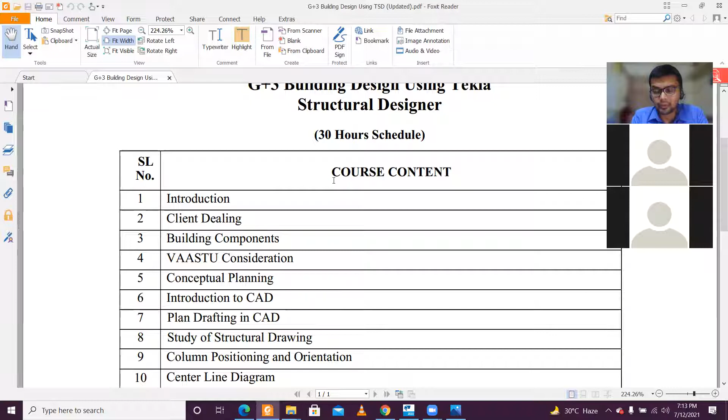Because if you want to take up your works individually - a lot of people here, after doing this course on Tekla, because we are not only teaching the software in this 30 days, 30 hours schedule, we are teaching G+3 building design using Tekla Structural Designer. This name has been chosen for a specific reason, because we are not focusing mainly on the software. Our focus is that after completing this course, you should be able to design a building completely from A to Z. So for that, we are discussing the client dealing aspects as well.

Client dealing is important because your building should be as per the requirements of your client. Those of you with experience on sites will relate to it better.

But I think one of you is a student as well. So for the students, I want to tell you, I think there are two professionals. Burhan has also joined, he is also a professional.

So there are two professionals and one student. For the students also, I'm telling, like in our course, BTech or diploma or MTech, when we design a beam, we are given the moments, the forces, and we design the beam. Same is for the footings. But here we have to design a building.

For that, the building plan should be, first of all, as per the requirements of our clients. Whatever he wants, you should do it. So for that, we are going to the client dealing part, how to take the requirements from your clients, requirements of the building for planning.

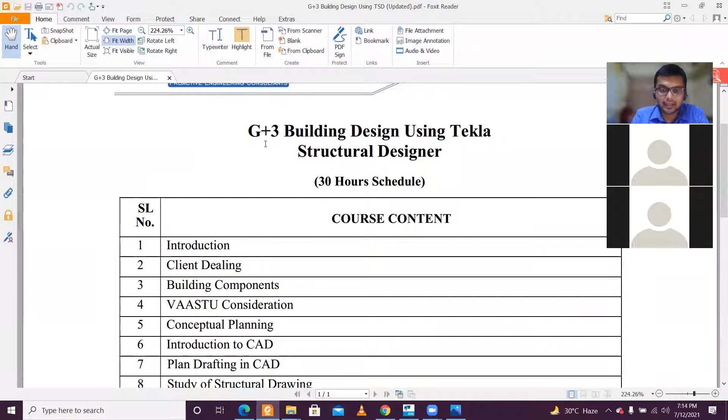So after that, we deal with the building components. What are the building components? These are the building components, not as per structural drawing, but as per the planning. The building components can be your different rooms like bedroom, kitchen, master bedroom, puja room.

So all these necessary components we just arrange, and some may be some people's necessity, some might not require it. Like for example, some people might require a balcony, some might not, some might require a separate puja room, some don't. And these are the building components. We need to know about these building components, and we need to know the basic sizes of those building components.

So why do you need to know basic sizes? Because we need to understand whether the size will suit the requirements of your client or not. We need to understand how to think about the building component. Suppose we give a standard component size of the rooms, but that won't help unless we know, okay, this is a portico or parking size of 12 feet.

Can it accommodate 2 cars? Or this is a bedroom size of 10 feet by 10 feet, can it fit a king size bed, a wardrobe, and one sofa? So can it do that? Like that, we have to think.

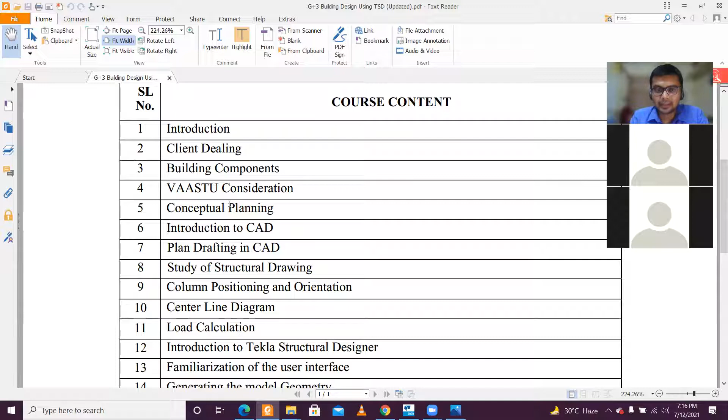So that is our consideration for the building components. Then comes our Vastu aspects. Vastu is very important, especially in India, because a lot of people have that particular belief in Vastu. It is not a science, but it is a belief. But since many people are following this, if we want to become a consultant in this industry, it is very essential to know certain aspects of Vastu which are considered for building planning.

We'll know Vastu from the building components wise, which component should be placed where. That basic part we should know. Otherwise, it will be difficult for us to communicate with the majority of clients, because almost 90% or 80% of the people want Vastu in their plan if you are dealing with an Indian client.

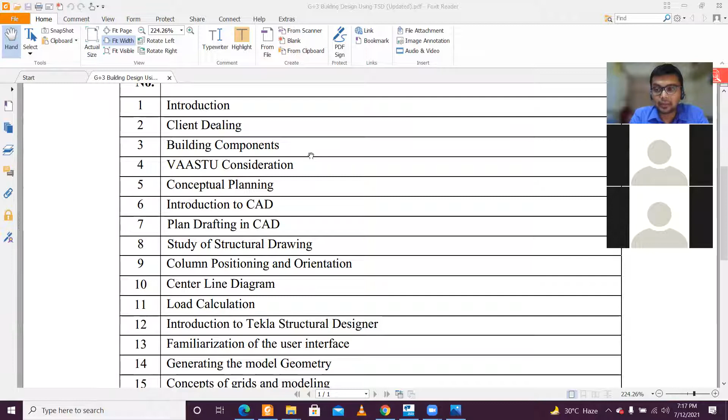So this is about the Vastu aspects, how to place which components and how to arrange your components as per the Vastu. We will know that, and after that comes the conceptual planning.

So when we talk about planning, many engineers think about AutoCAD. Planning is not AutoCAD. First of all, we have to make a structure of basics, and that contains a simple line diagram. The plan should be ready in your mind first, so we will tell you a process in which you can make the plan in your mind, how you can think about making a plan, and after that you can draw it on a piece of paper.

So we have a 3-step procedure which we are going to tell you for the planning part. Almost here 10 classes will be covered up to these first 5 topics, because these are the most important topics for the planning part.

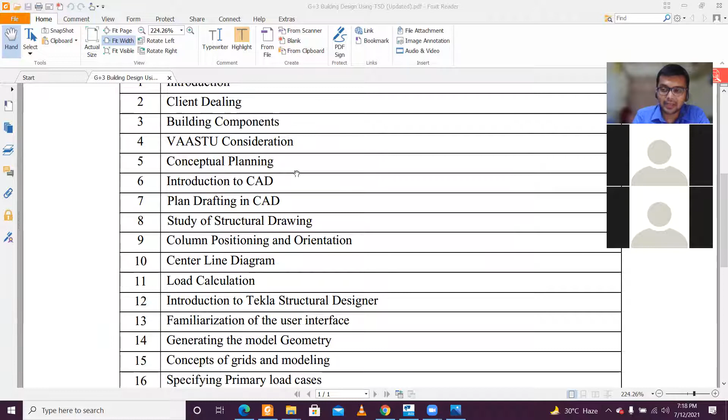And then when you have done the planning as per the Vastu, and when you have completed practicing 3 or at least 4 plans as per the Vastu, as per different sizes, and as per the architectural requirements, after that we'll move on to your drafting.

So now our drafting in AutoCAD should be defined - our text height, dimension height, and arrow size, these all should be the same. We'll maintain this and use simple commands for drafting so that we can complete our plan drafting in a very short possible time, along with the furniture layout, to complete the final architectural plan.

I'll also show you how the final architectural plan will look like in the coming video. So up to this point, when you do the plan drafting in CAD, you should be able to complete the planning part. So I'll show you the output which you will be having.

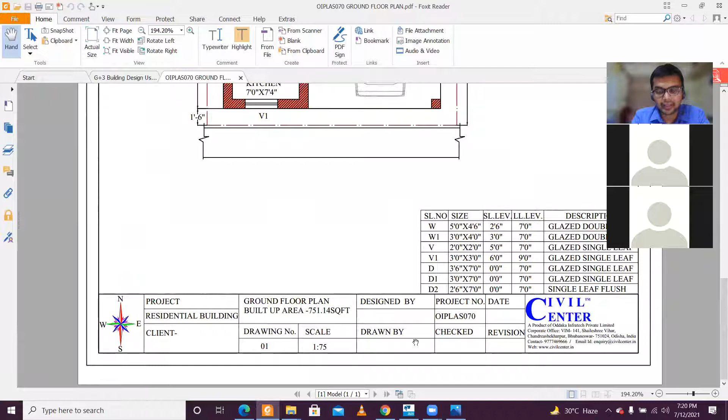And you will have the door window schedule, and you will have this particular title box in which the directions and other details are mentioned. So the first aim is to complete that, and this might look simple, but when you have to arrange components as per suitability requirements so that no space is wasted, and also take care of Vastu as well - those who have experience know better.

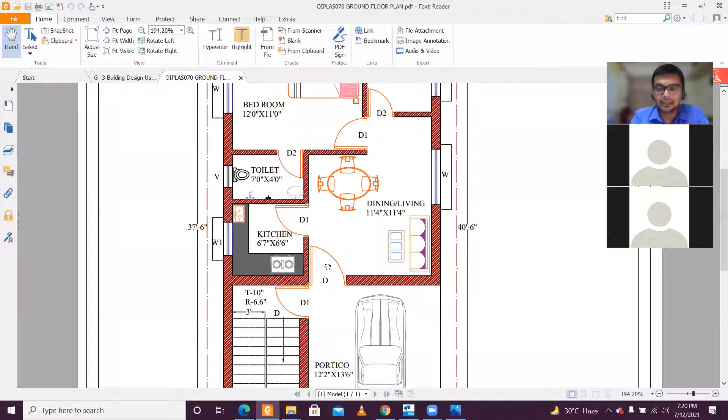It requires some practice and skills to arrange these components. We have to consider architectural aspects, engineering aspects, and Vastu as well - so all this we have to consider. So this is the first step in this process.

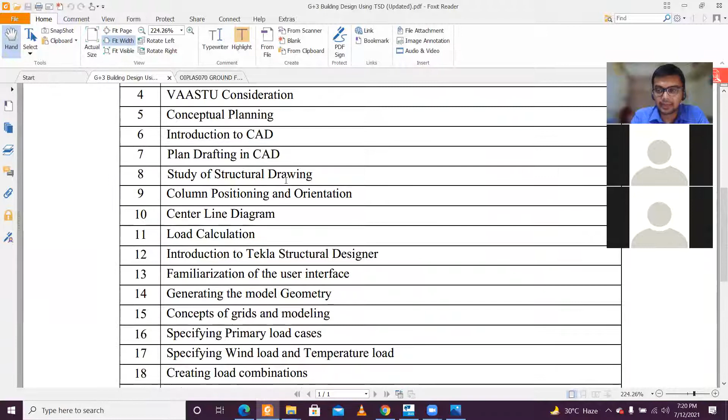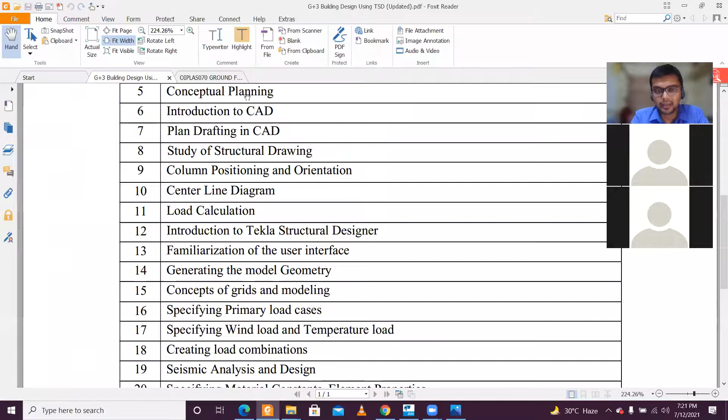And after that, once we are done with the plan, we'll go for the structural drawing. So the final structural drawing of any particular plan will contain all the components of your building. The structural components of the building are your beam, column, slab, staircase, and foundations - so it will contain all the things.

So first, when you study structural drawings, we see the notes first. In the notes, it is written that the drawing will be studied along with the architectural drawing, and the standard codes - the earthquake code, the RCC code, and the wind code - have been written here. The grade of concrete and grade of steel to be used is written here, and then the lap length and clear cover of all structural members will be written in the structural drawing.

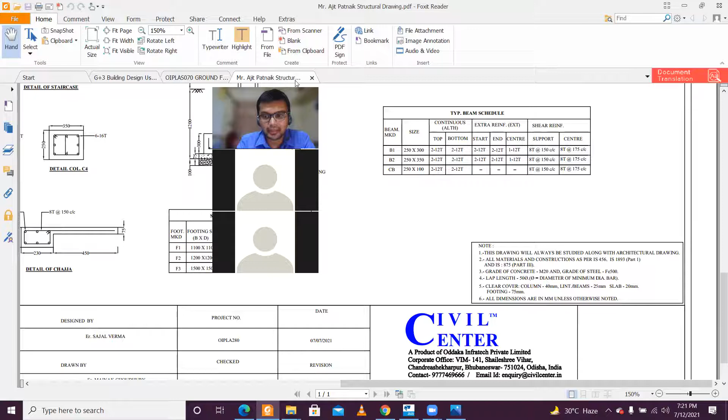So those of you who are already working, you already know about this particular thing, and some new members have also joined. If someone doesn't have any idea about this, then how can they manage? That's what we are going to show - if someone has no idea about this, they can also learn.

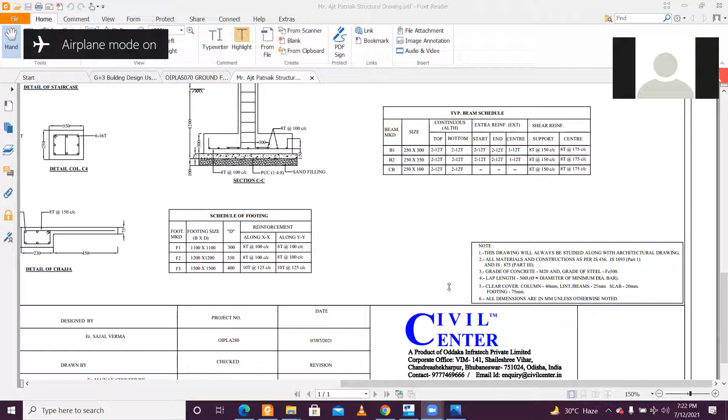Hello, am I audible? Yes sir. Okay, I think the connection got paused for a second - I accidentally pressed a button. So I think Snehash is asking, if anyone doesn't have any idea, then what should they do? I am referring to some people because they can relate to it better, but this course is done from the basic level, so everyone can do it. I'm just relating to them, but it is for everyone, and everyone can do it, so there is no issue in that.

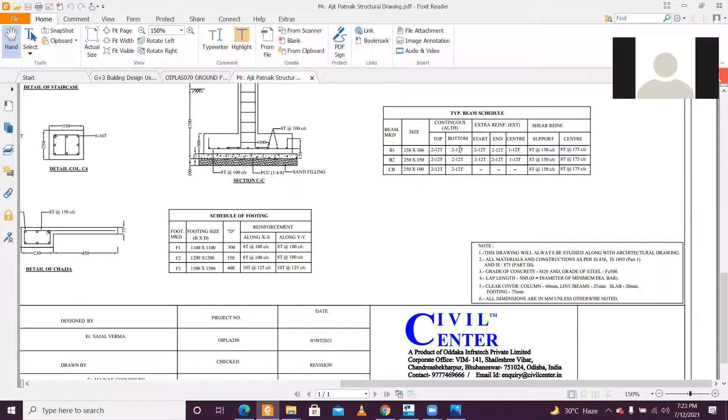So this is our particular portion of the structural drawing, and here we have this foundation layout. In this foundation layout, all the sizes of the foundation are given, or rather only the markings of the foundation are given, and the distances are given center to center.

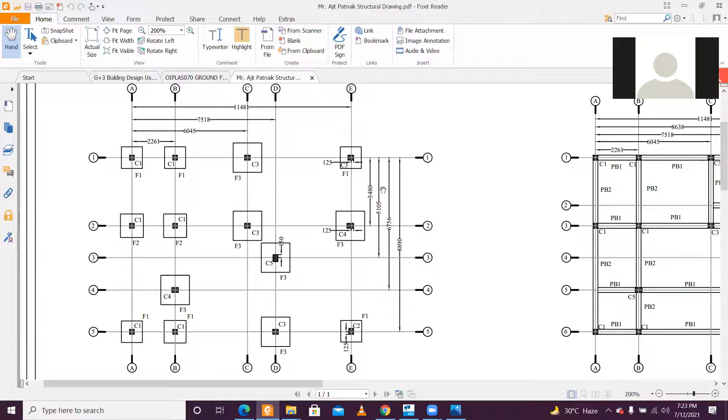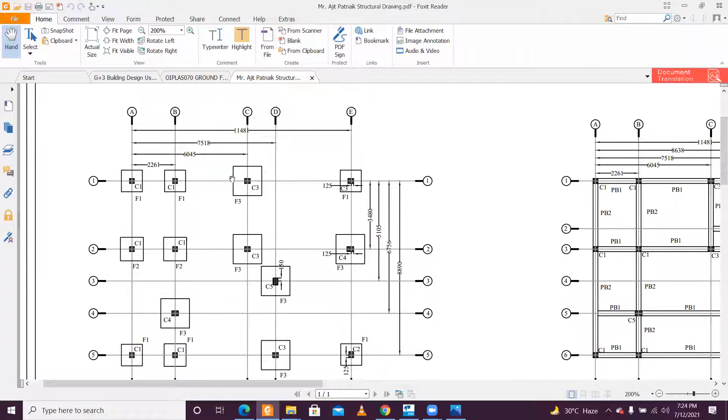So what happens - I think Snehashi had mentioned that the first thing in the construction or execution phase is the excavation. But before the excavation, there is also the marking part. In the marking part, we have to use this particular footing center lines or footing layout, and the layout can be done with the help of a total station or manually. So this is the foundation layout.

And after that, if you want to see the foundation schedule, you will see the foundation schedule from here. So this is the foundation part.

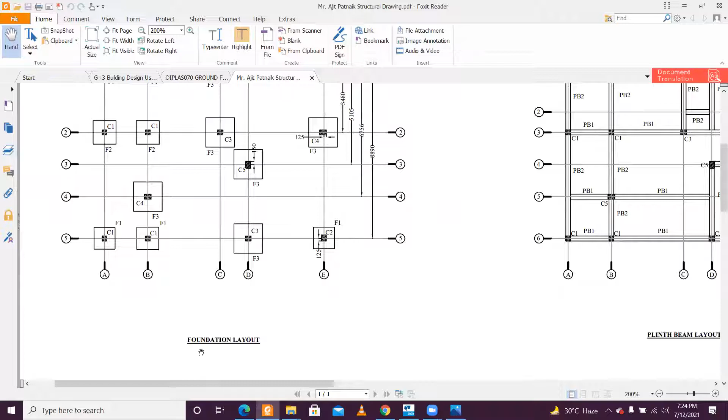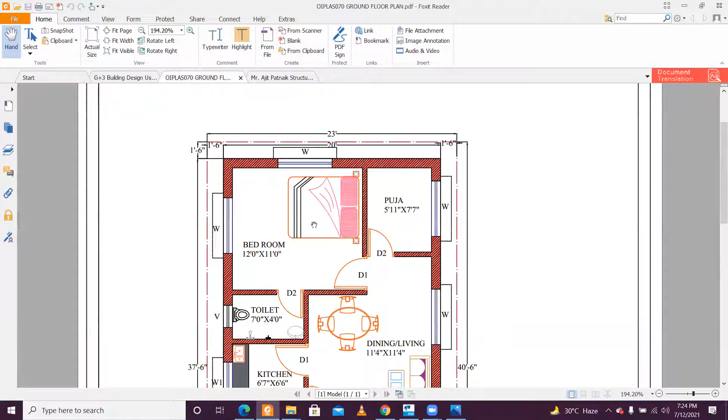After that, we'll also cover similarly the plinth beam schedule, the roof beam schedule, and also details of other structural members. Our ultimate aim is to prepare this as per the requirements given by your clients. We have to prepare the structural drawing and also the architectural plan. These two things are our final output as a civil engineer, which we need to do in planning and design.

This is what we are going to cover in this course. That's why I always say we are focusing less on the software, more on the output. We want the output because we want jobs and want to learn a skill that will be useful for us, so that if we want, we can start as a freelancer, or even start our own company. For that, we need to know the entire process, and that's what this course is.

Let me also discuss the outline now. When the plan is ready, the study of structural drawing will be done, and then column positioning and orientation will be done - how column position and orientation affects the loads and the economy of the building. Because as a structural engineer, it is our primary goal to do two things.

The first thing is - can anyone tell me what is the duty of a structural engineer? What do you think is the responsibility of a structural engineer? In simple words, not a bookish definition - what do you think is our role as a structural engineer?

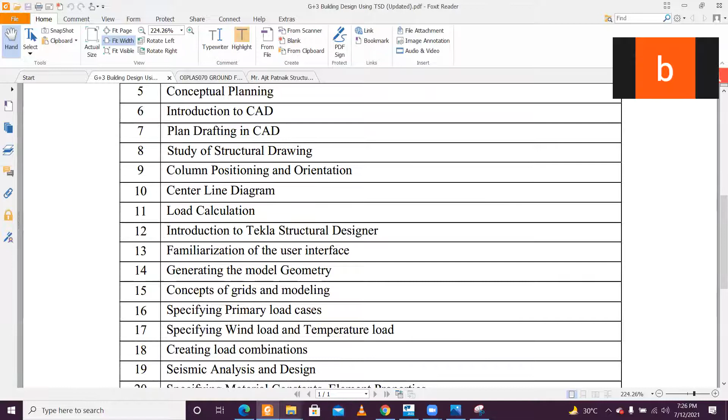Providing a safe structure to our client - yes, and economical, yes. So Burhan has mentioned two things: safety and economy. That's actually right. So primarily we have two things - one is safety and another is economy. In addition, I can tell you there are some other things too, such as aesthetics.

So why aesthetics? We have to satisfy certain architectural constraints sometimes, and we have to fulfill those as well.

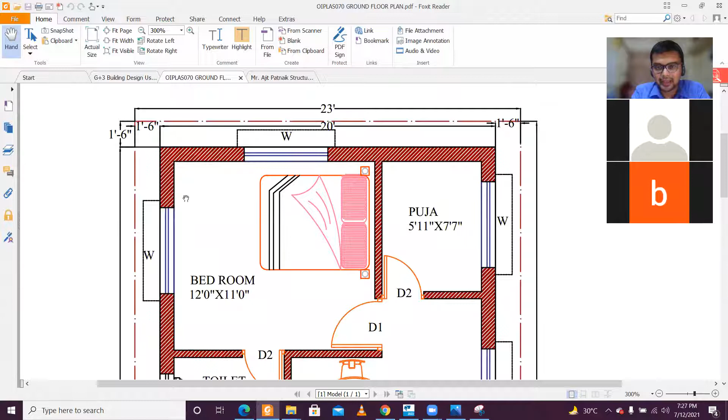For example, suppose in a particular building we have a 20-foot span, and the entire floor will be used for parking. The client can request that in the entire 20-foot span, there shouldn't be any beams in between. Sometimes it might also be asked that no beam should be visible in any room, so we might have to provide beams in other spans instead. Those requirements also we have to ensure. But the main focus is safety and economy, and then aesthetics.

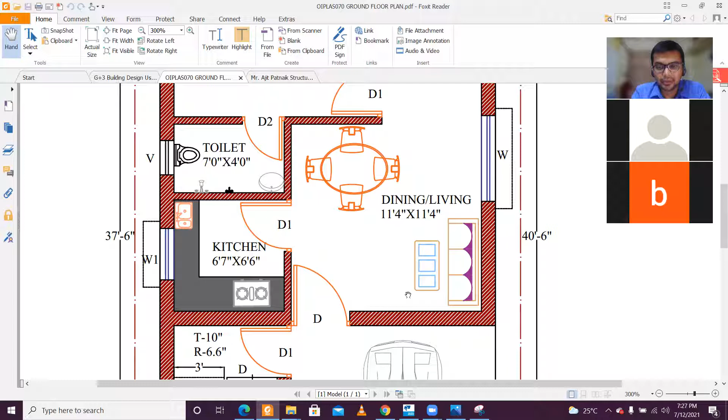You may know this phrase 'sasta sundar tikau'. Sasta means economic, sundar means aesthetic, and tikau means durable. Durability actually comes last. First of all, what our client wants - generally the mentality of Indian people, including me - when we buy a product, we think about economy and aesthetics first, and then we think about durability. But as a structural engineer, our first priority will be durability, because otherwise we won't be doing our job properly, and we might also face troubles.

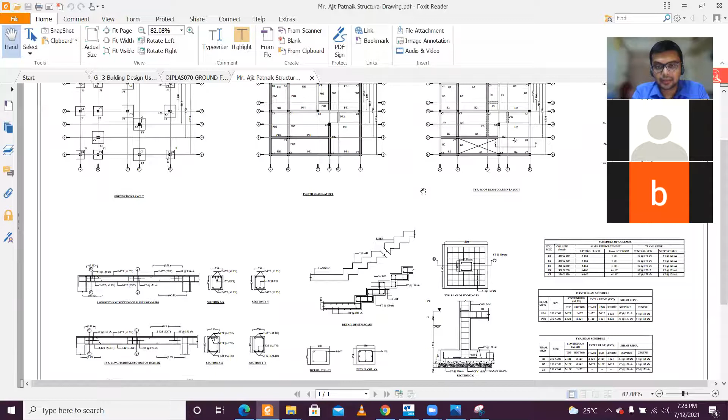So this is the thing - and after that, where was I? The column positioning affects the economy of the structure - where you place the columns and how you orient them. Which side is the longer dimension of the column facing? If a column size is 215 to 400, which side is the 400 rotated toward - is it along the wall, vertically or horizontally, when seen from the plan view? That affects the building. So we'll do this column orientation and also some iterations to check which column orientations will be proper.

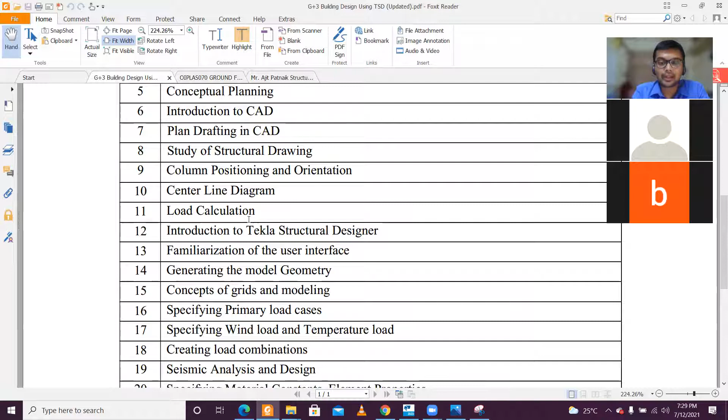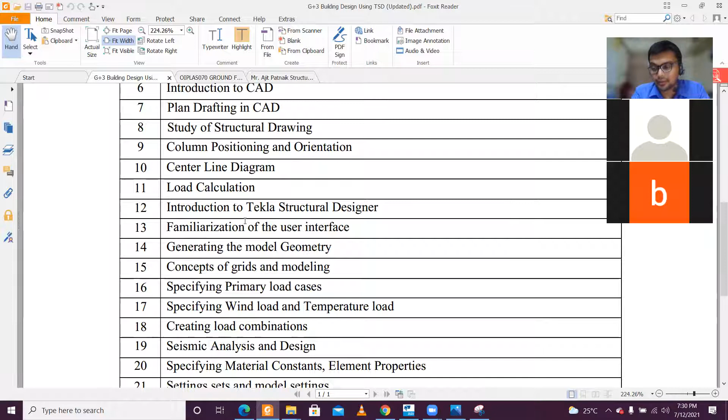If the wall size is 230, then we'll take 230 to 230, and we'll place the center lines in the middle. After that, we'll import the center lines into Tekla. There is an additional feature of Tekla which is not there in STAAD and ETABS: we can import the plan also as a shadow, so we know in which position we will place the columns. We don't have to look into the plan again and again, so that is a possibility.

After that, we'll go into the Tekla Structural Designer, into the load calculation. So what are the load calculations? Load calculations are things like the wall load, and we'll calculate the wall loads which will be used in the building.

The wall load depends on the masonry material, whether you use AAC blocks, red bricks, or fly ash brick - the load calculation will be different. Also the floor to floor height will affect the load calculation for the dead loads. And in the load calculation part, we will also define our live loads - what will be the live load for this particular building.

As you know, in IS 875, table number 1, part 2, there are different live loads given for different buildings. So all the loads which we take in the software, we will see from the codes first.

Also I'll give you a brief idea about the seismic code and wind code, because when we select options in the software, you should know these terms like moment resisting frames, ordinary moment resisting frames, and in wind load there is a term called fetch distance. These are the terms so that when you see them in the software, you don't get confused and can use them easily. All these things will be done in the load calculation part.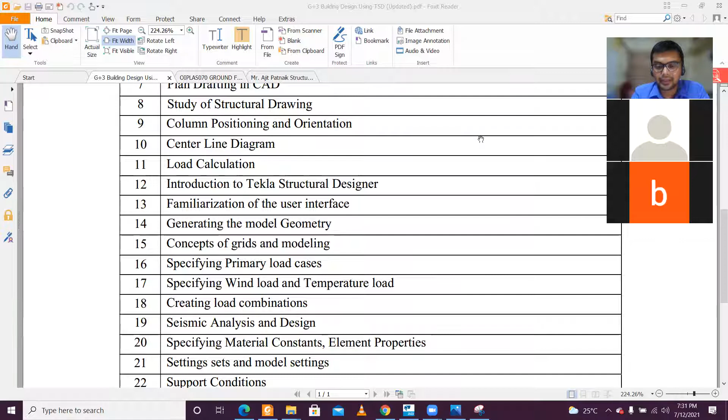After that, the Tekla part will come, and in the Tekla part all the things will be done like analysis, design, creating load combinations - everything will be done. That thing is already covered - you can see there are a lot of videos on that.

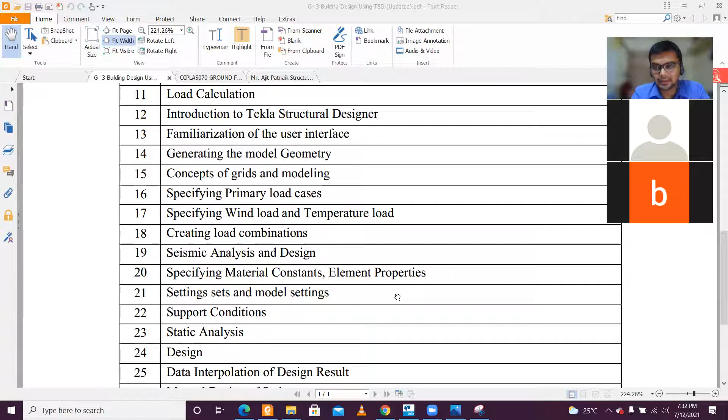But the main thing is that our aim is that you should be able to make that particular model error free for any building, like up to G+3 or G+4, G+5, within 15 minutes. That should be your aim, because once you complete the modeling and design in 15 minutes, then you can do the interpolation, which is the main aspect.

This is the main aspect of all and the most important step in structural design, which Burhan had told - economy. Safety and economy will be tested in this design interpolation. We will see different combinations of columns, different combinations of beams, which can give us a stable result as well as an economical result. We'll try different things, and after that we'll achieve a single design. Even when I am designing, I'm also spending most of the time in the interpolation process.

But what happens when you have some experience of 1 year, 2 years, 3 years, when you work on some projects, then you have an idea like, okay, this will be safe in this much quantity. So that experience you have to gain, and before that you have to do extensive interpolation.

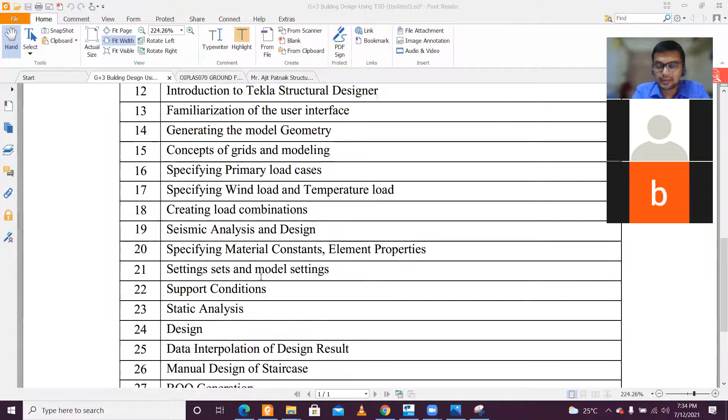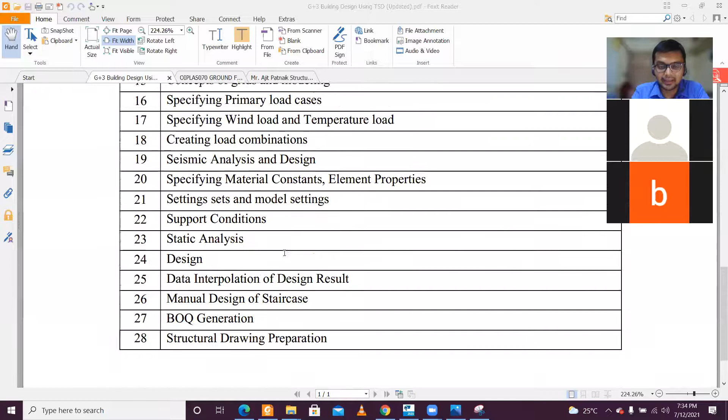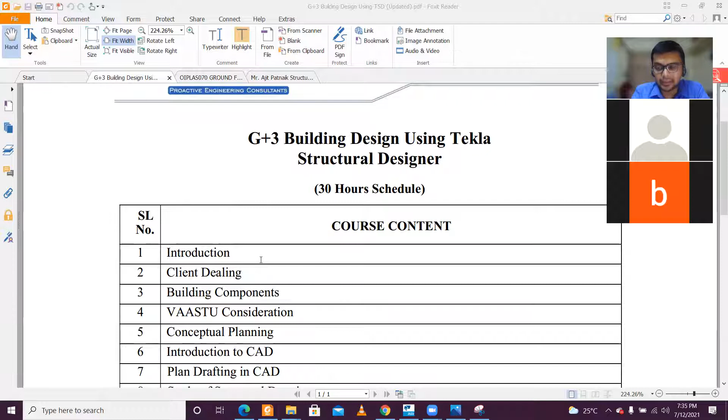There will be some work, but from my previous experience, it takes around 40 to 50 days to complete this 30 hour course, because gaps happen in between. This is not a small amount of time, it's a lot of time, in which you will learn how to think and how to do the entire process, and you will develop the mindset of a structural engineer. That's how this course has been designed. Previously some students have taken it, and some people are successfully running their own consultancy firms, while others are working jobs. I hope you can also take advantage of this course. If you want to ask any questions, we will have a question and answer session now, and we'll discuss everything about what this course will cover. So let's start.